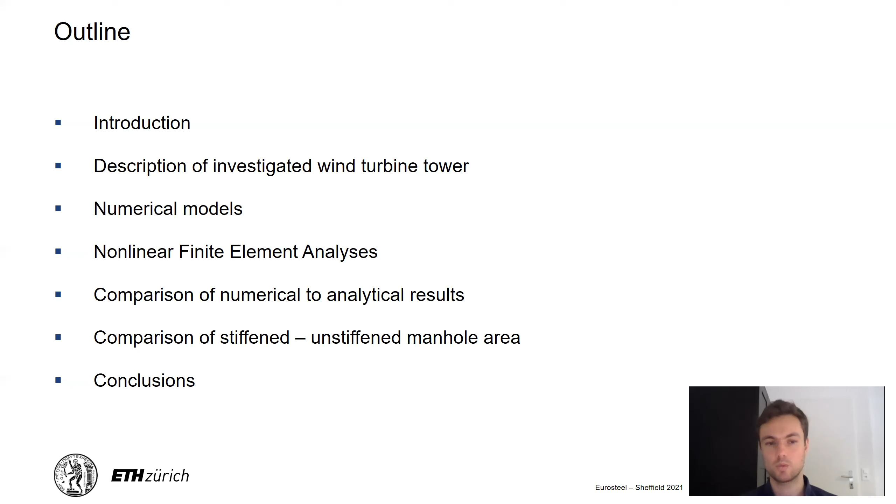This study is on the buckling verification of the manhole area of steel wind turbine towers with the use of nonlinear finite element analysis. In an outline, my presentation will include a small introduction, then the description of the investigated geometry, the numerical models that have been created, and the nonlinear finite element analysis that have been performed. A comparison of those results to analytical calculations is further offered. And towards the end, a comparison of the typical stiffened geometry to some unstiffened or partially stiffened solutions is studied. This presentation will conclude with the main observations of the study.

As for the fabrication of a steel wind turbine tower, this includes first the cold curving of the steel sheets, then the welding of the parts both in the longitudinal and in the circumferential directions, as well as for the ring flanges which will connect the individual parts. Of course, towards the bottom of the tower, the manhole area is located, which will be the main focus of this study. And at the end, the fabrication of a tower includes, of course, the painting and the internal mechanisms of the tower that are required.

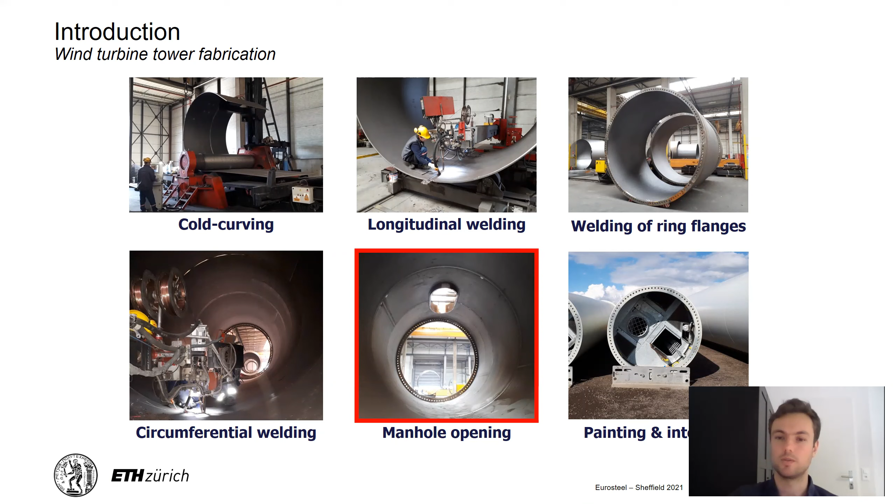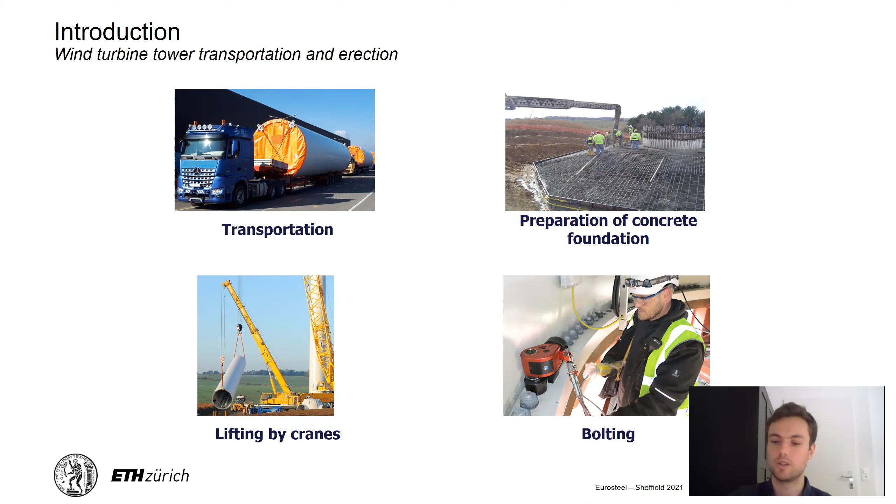As for the erection of the tower, first the preparation of a concrete foundation is required, then the transportation of the individual parts and lifting of those to the correct position is included before being bolted with bolt connections between the ring flanges of the individual parts.

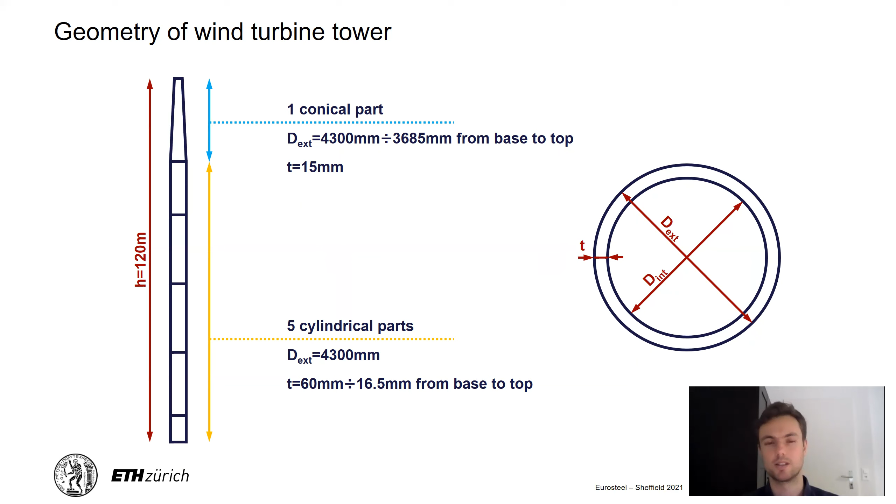As for the specific geometry that is used in this study, it includes a 120-meter tall tower that has 5 cylindrical parts of a diameter 4.3 meters and an upper conical one of variable diameter, but this is not the main focus of this study.

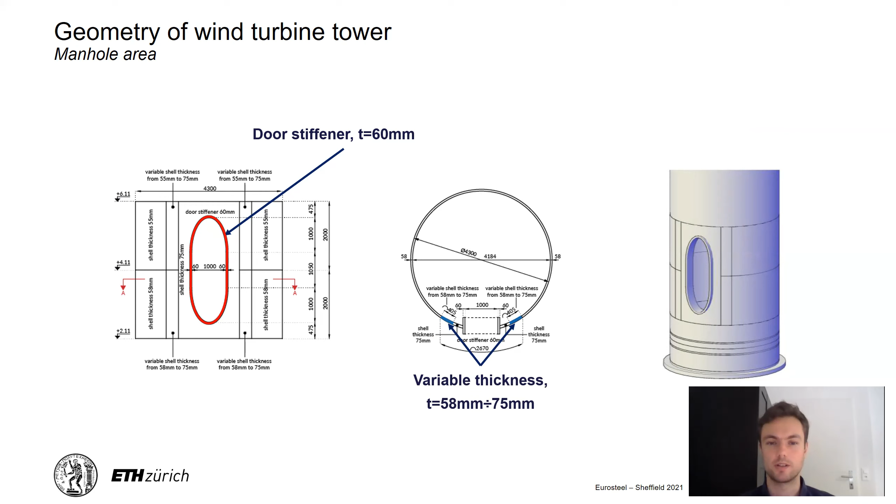What is the focus of the study is the manhole area of the tower, which is located towards the bottom of the tower. And apart from the obvious opening, it includes a transverse door stiffener with thickness of 60 millimeters and thickening of the shell of the tower close to this area with a variable thickness of from 58 to 75 millimeters.

As for the models, we have created finite element models and have simulated the ring flanges with beam elements, the shell of the tower with shell elements, as well as the transverse door stiffener. As for the boundary conditions, we have considered full fixity at the base of the model and the free end at the top of it.

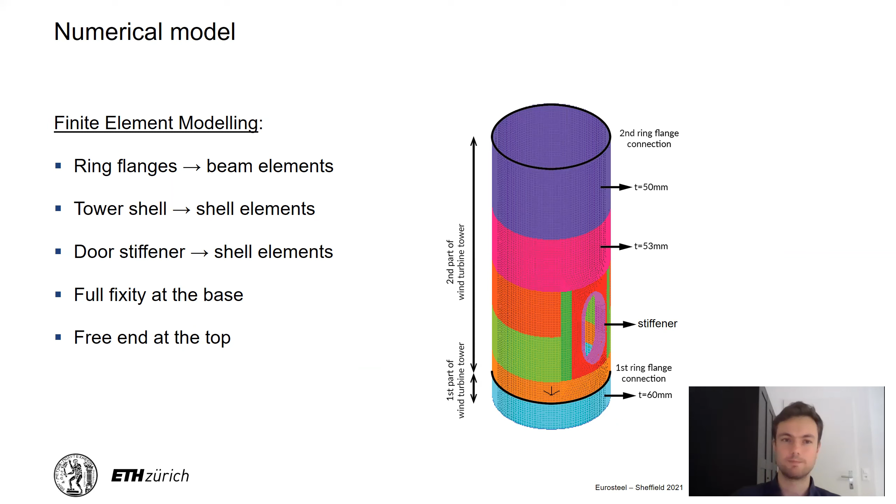As a first step, we have studied the results from the linearized buckling analysis. We have performed parametric analysis to evaluate the effect of the direction of the actions on the critical loads. We can see at the graph at the top the directions that we have considered and end up to the conclusion that the critical direction is that of the 45 degrees for the shear force and respectively to the moment that this produces.

As for the 3 first buckling modes of the structure, we can observe that they are similar both in terms of the shape as well as for the critical load.

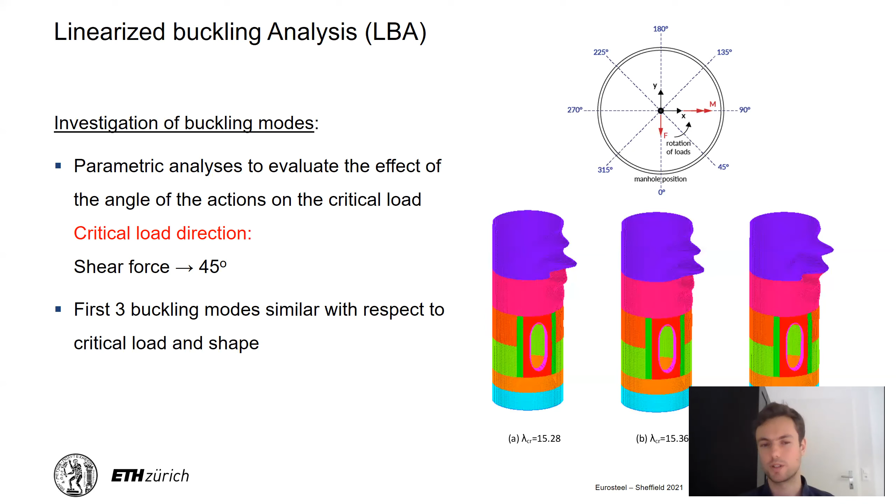In order to perform geometrically nonlinear analysis, we need to determine the initial imperfections of the geometry of the structure. We have followed the provisions provided in the Eurocode, where 3 fabrication classes are explained, and depending on the fabrication class, there's a different level of deviation of the structure from the idealized geometry.

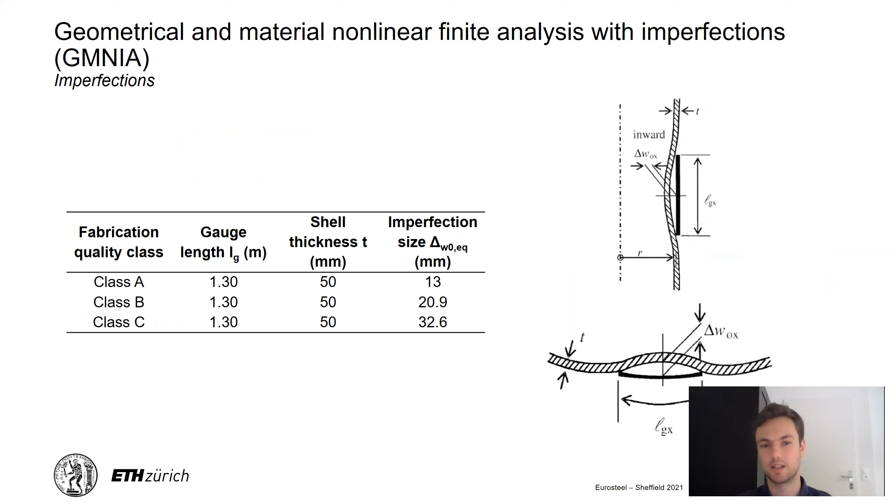So we have performed geometrical and material nonlinear finite element analysis with the inclusion of imperfections. Once again, we have performed parametric analysis for varying direction of the loading, as well as parametric analysis in terms of the shape of these initial imperfections. These are defined as following the shape of an individual buckling mode, or a superposition of more than one. Once again, we can observe good agreement between these results and the ones from the buckling analysis, which conclude that the 45-degree angle direction is the worst case scenario.

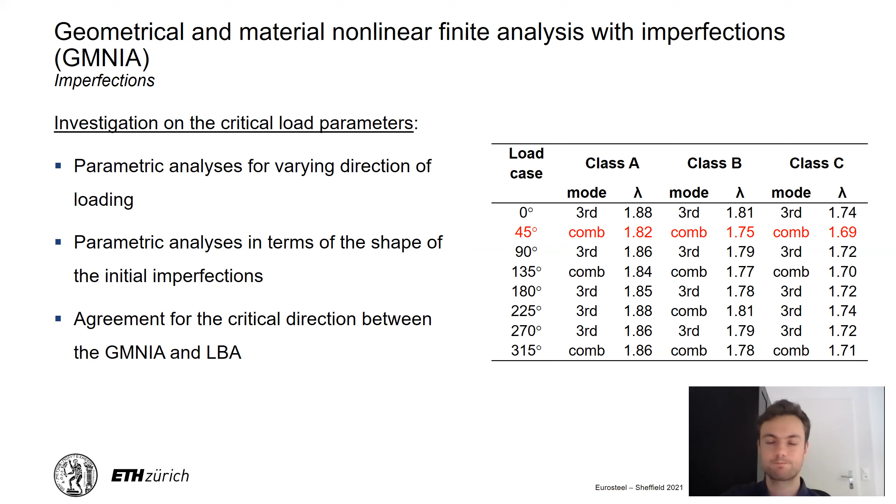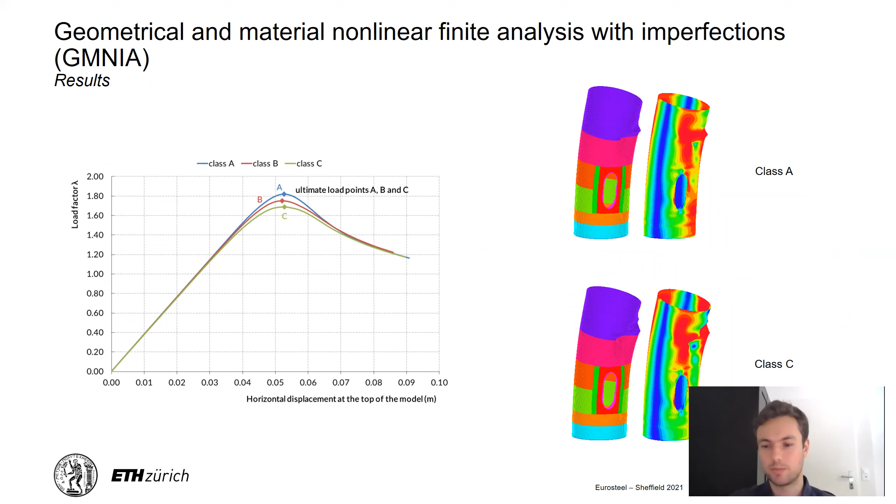We can observe the equilibrium paths of the system, and for different fabrication classes, the higher the fabrication class, the more the strength and the capacity of the structure. We can also see the deformed shape of the system, as well as the resulting stresses. And we can see that they follow similar patterns between the different fabrication classes.

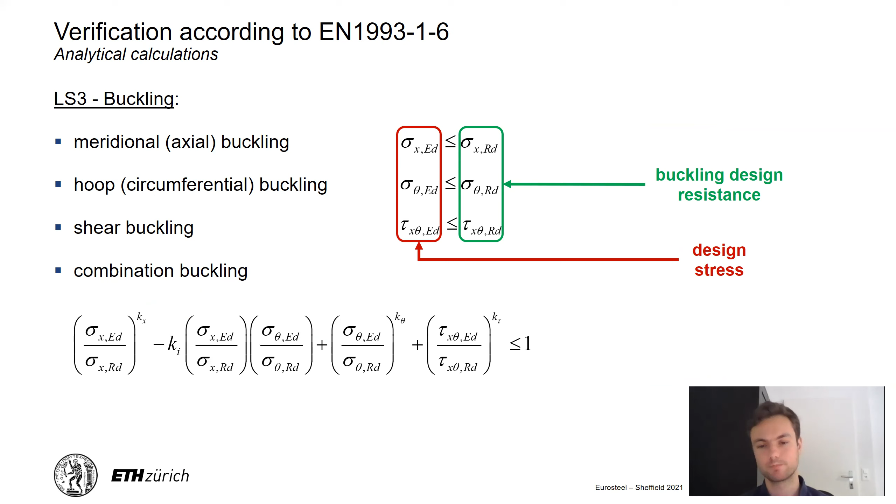We have also performed analytical calculations following the ones that are offered in the Eurocode, which include the study in the axial direction, the circumferential one, as well as the shear buckling. And additionally, the combination of buckling for all directions concludes to the ultimate capacity of the structure from these analytical derivations.

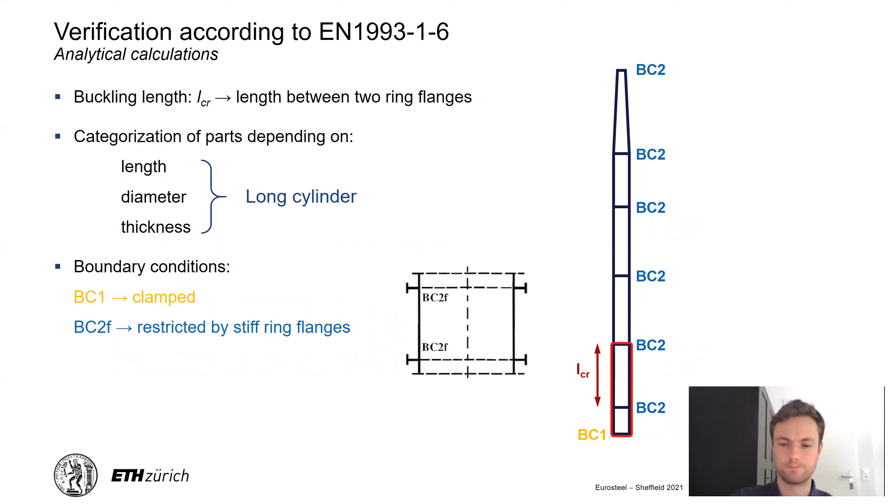For this purpose, we need to define a critical length, and we focus on the bottom part of the tower. The critical length is defined between two ring flanges, and we need to categorize the part depending on the length, diameter, and thickness of it, which is considered classified as a long cylinder. As for the boundary conditions, we consider the bottom of the tower to be clamped, fully fixed, and at the levels of the ring flanges, the boundary conditions are considered to be restricted by those flanges, representing pinned connections.

So comparing these results of the analytical derivations to the numerical models, focusing on the B fabrication class, from the numerical analysis, we can spot the most unfavorable result and compare it to the analytical output after applying the partial safety factor, and we can observe that there's good agreement between the two solutions.

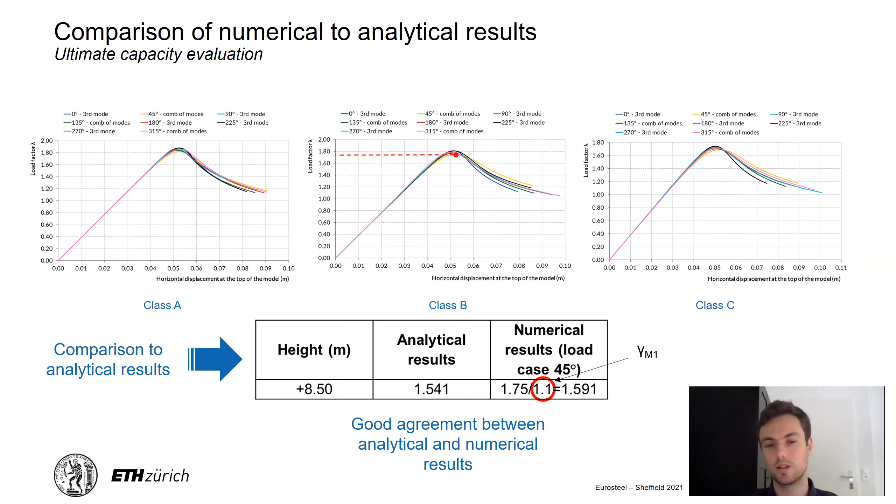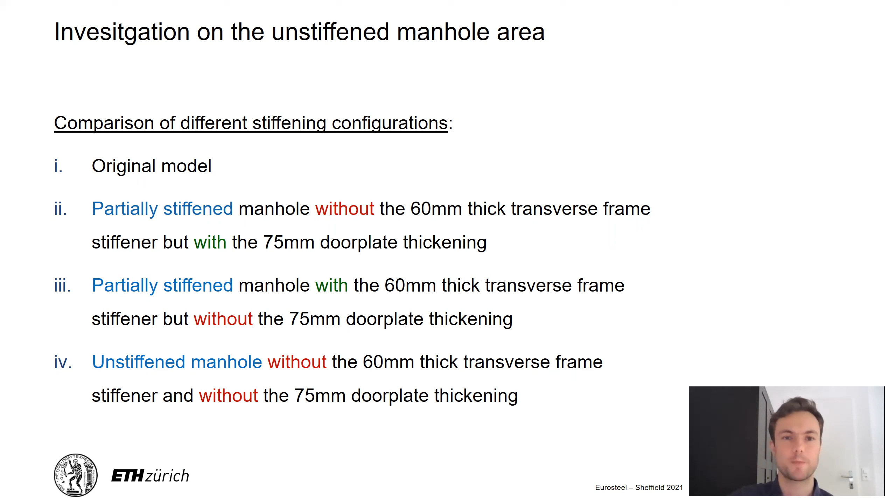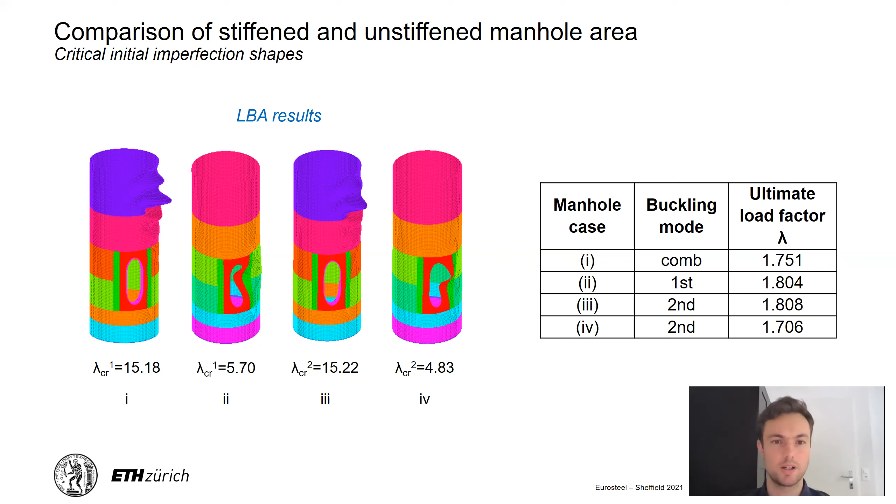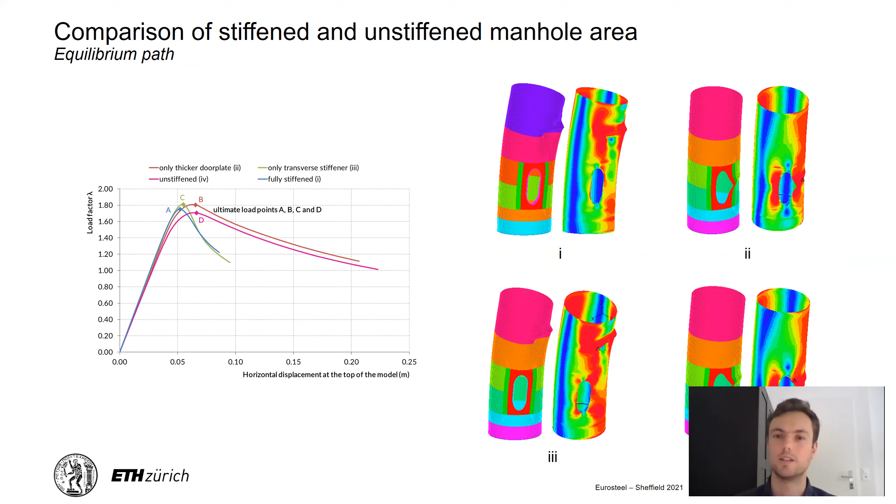As for the linearized buckling results, we can observe that models that have the transverse stiffener have significantly increased critical load. However, in terms of the ultimate capacity of the geometrically and material nonlinear finite element analysis with the inclusion of imperfections in a similar way that we did before, we result in similar capacities, which is somehow explained due to the fact that the system is highly influenced by material nonlinearity, since the ultimate capacity is way lower than the one predicted from the buckling analysis. And we can also observe that for the cases that the transverse stiffener is not present, the failure is located at the door, close to the opening, whereas for the cases that the stiffener is present, the failure is directed towards the upper part of the model.

In conclusion, we have performed a numerical investigation of a 120-meter tall wind turbine tower, applying realistic wind loads, and we investigate the buckling response near the manhole opening. The effect of the load direction with respect to the manhole area is evaluated, and we have also come to the conclusion that the effect of the initial imperfections plays a significant and considerable role in the ultimate capacity of the design.

We can also observe that the stability of the manhole area is influenced significantly by the presence of the transverse stiffener, where the failure is directed away from this area. However, we observe that the ultimate capacity remains somehow close to the original one. And we can also observe that the thickening of the door plate is less effective in this direction.